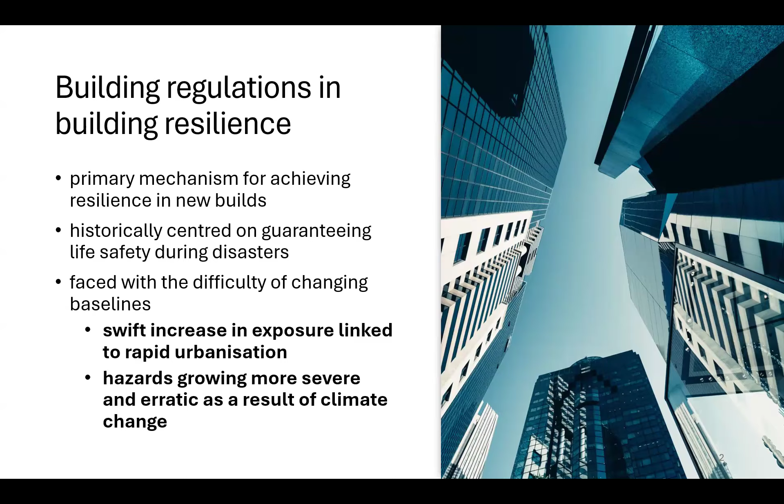Now, there are multiple ways by which we can have the building code contribute towards climate resilience, and we'll go through them one by one briefly in this presentation. So the four main things would be provisions on elevating material performance against climate hazards or climate impacts, increasing design loads, allowing provisions for adaptable and flexible designs, and finally, incorporating green building into the code.

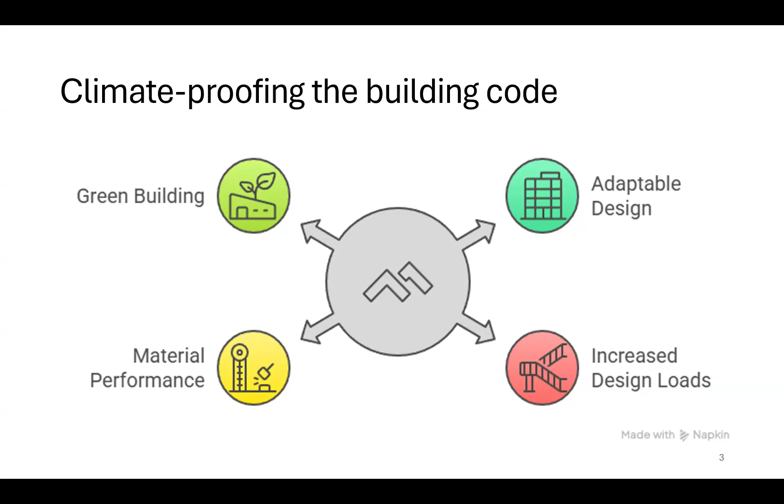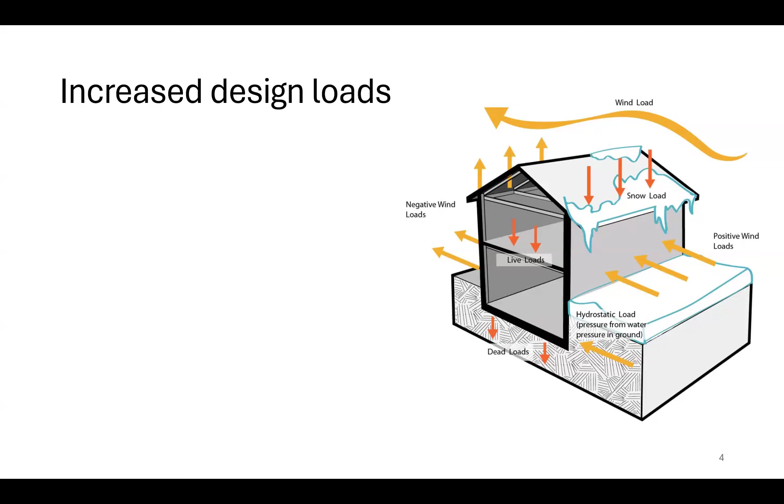The most common way by which we tweak our building code to make it more responsive to the impacts of climate change is by increasing design wind loads. I've seen this in my experience in updating the building codes in the Philippines. In the aftermath of Cyclone Haiyan, the wind zone map was updated to take into account newer maxima. So with increased design loads, we make our structures withstand more intense hazards as we update the probabilistic hazard maps.

Some countries would have their own flood codes, earthquake loads, and in the case of temperate countries, adjustments in snow loads. Increased design loads also give due consideration to updated hazard models and intensifying hazards due to climate change. From what I've seen so far, most of the codes only take into account what has happened so far and do not really take into account yet the possible trajectories with different RCPs. So there's still work to be done on that.

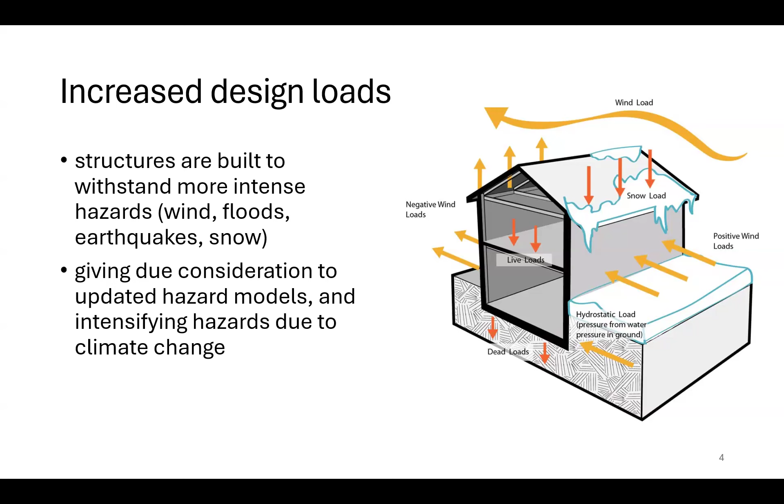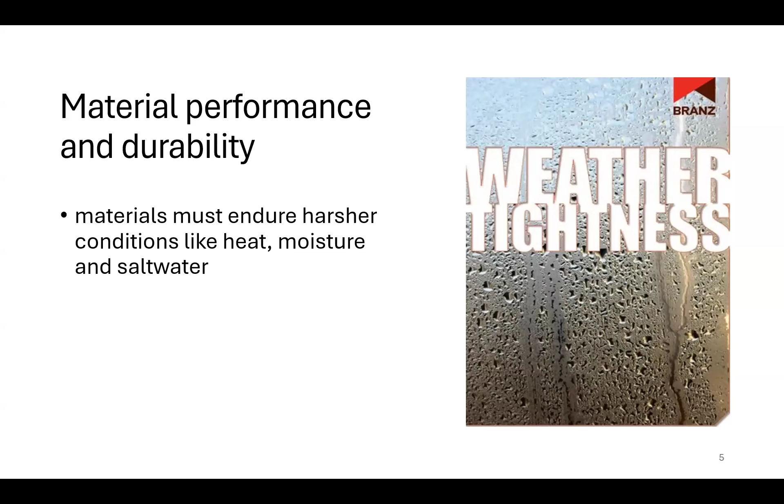The second way by which building regulations could be more responsive to the impacts of climate change, or making our built environment more resilient to climate change, is by incorporating provisions for enhanced material performance and durability. Again, due to climate change, materials now must endure harsher conditions than they had before. So conditions like heat, moisture, even saltwater intrusions, because we get more cyclones, and then therefore you get lots of sea breezes too.

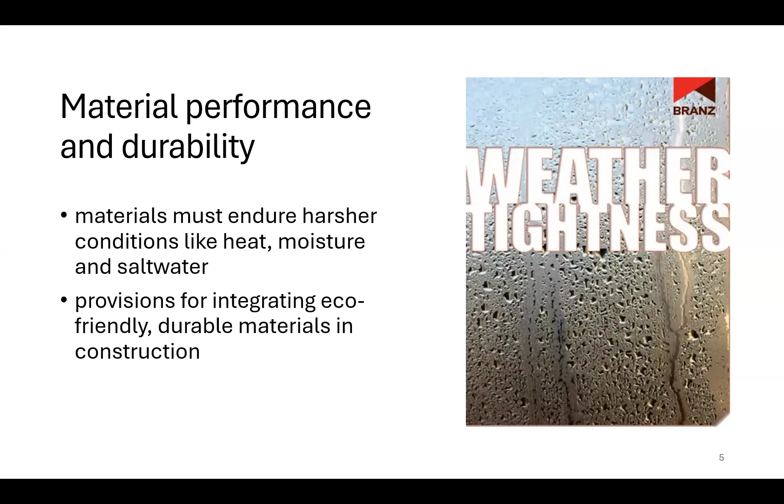And then there's also on the other end of the spectrum, we have material performance provisions for integrating allowance for eco-friendly or durable materials. The other thing is that, and I must say that this is one of the biggest challenges in making structures in the ASEAN more resilient to the impacts of climate change, is that we have strict prescriptive building codes. By prescriptive building codes, we mean that we tell the people how to create, or how to design structures.

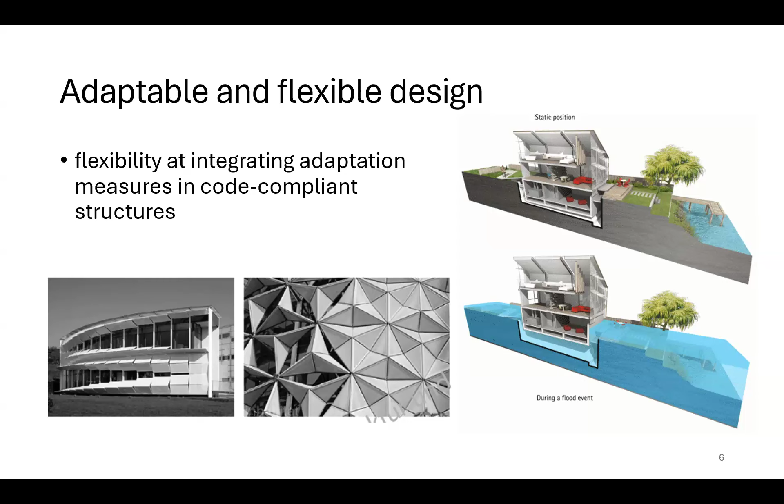And when we do that, we limit the possibilities by which we can configure our structures. Now, if you look at the building codes of most of the ASEAN countries, you wouldn't see provisions that you can comply with to implement, say, a house that floats with increased flood levels, or maybe window angles changing with the time of the day or the heat in the surrounding environment. So there's still room for improvement in that regard to allow flexibility at integrating adaptation measures in code-compliant structures.

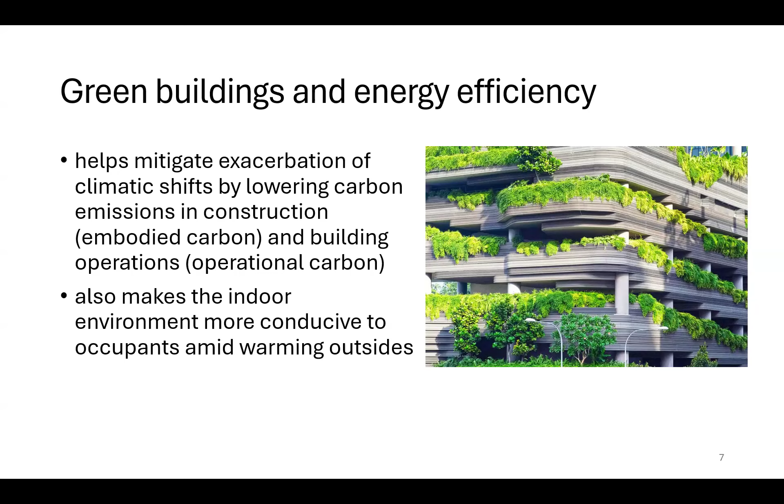And then lastly, we have green buildings and energy efficiency. So I think this works on the other end of the climate resilience. So green building provisions help mitigate the exacerbation of climate shift by lowering carbon emissions in construction, both the embodied carbon and the operational carbon. At the same time, it also makes the indoor environment more conducive to occupants amid a warming outside environment.

Now, building codes not only shape the resilience of the built environment to climate hazards or to climate impact, building codes themselves or building regulations themselves are shaped by the hazards that happen in an area. So, for instance, Jamaica had their first building code implemented in their country after their Hurricane Gilbert experience. So they adopted the International Building Code. In Australia, they updated the wind-related structural standards in the aftermath of Cyclone Tracy, which caused heavy devastation in the Northern Territory, part of Australia.

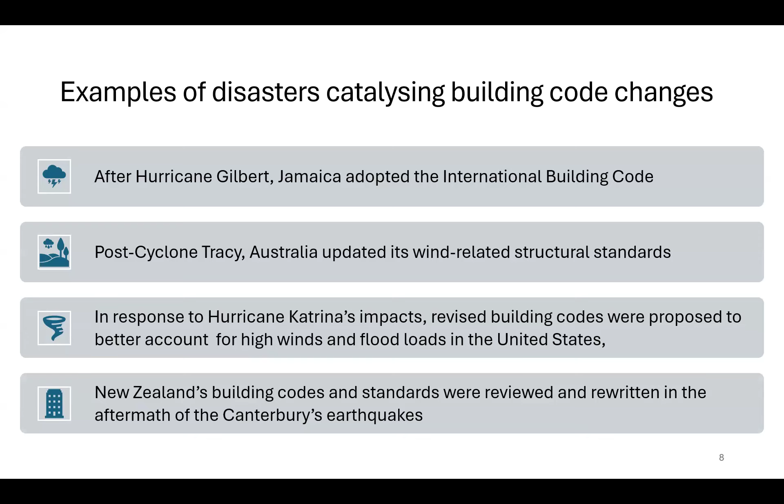In response to Hurricane Katrina's impact, the U.S. revised their building code to better account for high winds and flood loads. And in the aftermath of the Canterbury earthquake, the New Zealand building code and standards were reviewed and rewritten. However, not all of these updates or these upgrades and changes to the building codes have been successful.

So I would say, based on reviews, some of the challenges causing us to still have inefficiencies, or building code updates not resulting in enhanced resilience, is that there may be the inability to elicit regulatory compliance. So we may have building code, but if the regulators cannot implement them anyway, it doesn't amount to anything. And this stems possibly from poorly planned rollouts, but also it may stem from the lack of knowledge and capacity by building practitioners. So it will take time for building designers, constructors to be able to grasp and be familiarized with revisions in the building code. So it's up to the policymakers and decision makers to accelerate that adoption.

It may also be that the building codes that we adopt could be incompatible with the local building stock. And that would be, I would say, the experience of Jamaica after they adopted the International Building Code. But I've seen that also in Fiji adopting the Australian and New Zealand Building Code. But then these codes cater to contemporary structures. But how about the traditional structures like bure?

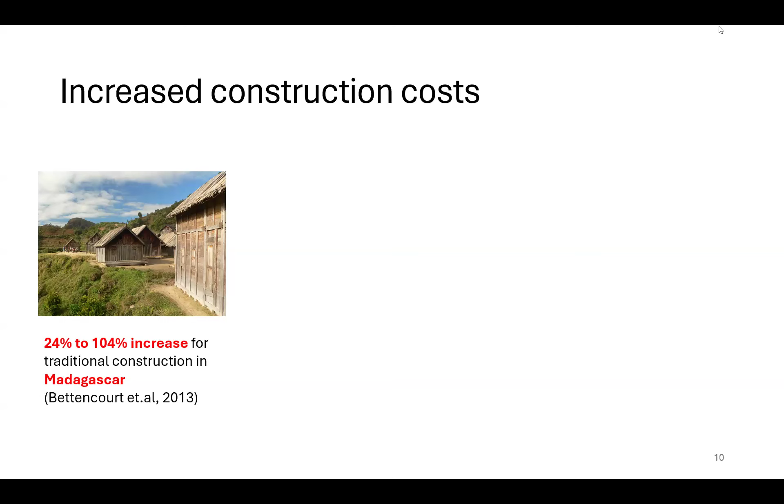And then the other thing, which is equally as important, is that people may want to comply, but because of budget constraints, because of prohibitive costs, they're unable to afford compliance. And we've seen that in the case of Madagascar updating their building codes. So they've seen a 24 to 104% increase in the cost of traditional housing units in the highlands of Madagascar. And then after Australia implemented changes to its fire protection provisions, after the Victorian bushfires, there was a 30% average increase in housing construction in Victoria.

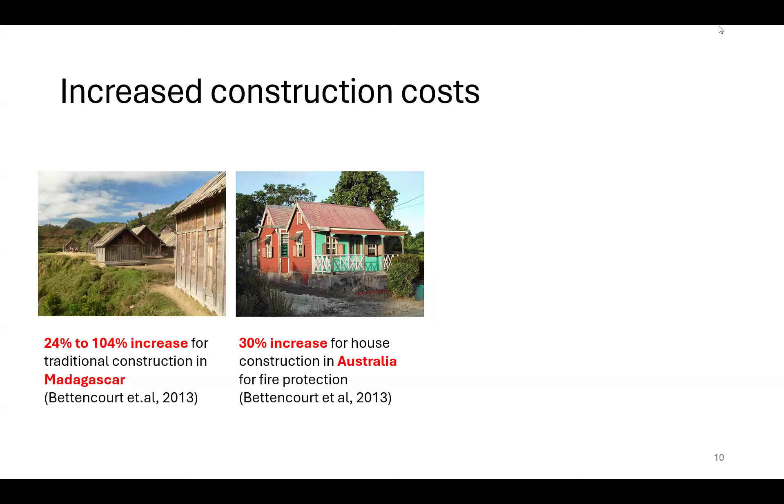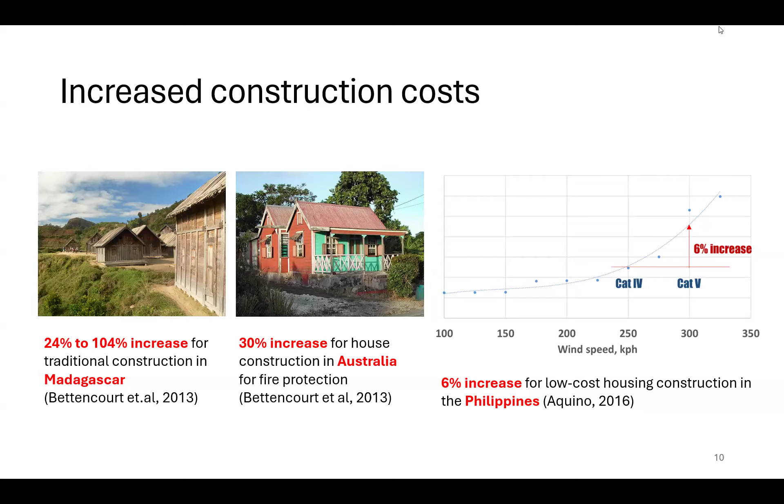And in the Philippines, when we adjusted the wind zone maps in account of more recent hazard events, there was a 6% increase for low cost housing on the average. Now, we might say, okay, these may just be upfront costs, but if we look at it on the long run, then we would actually see the benefits.

And so in this slide, I just show a quick calculation of the economic analysis from a life cycle perspective. So the additional cost that we spend with the building code update is denoted by the left-hand side, alpha C, where alpha is just the percentage increase in the cost, and C is the original cost of construction. And that has to be equivalent to the net present value of the expected annual loss for the building throughout its useful life.

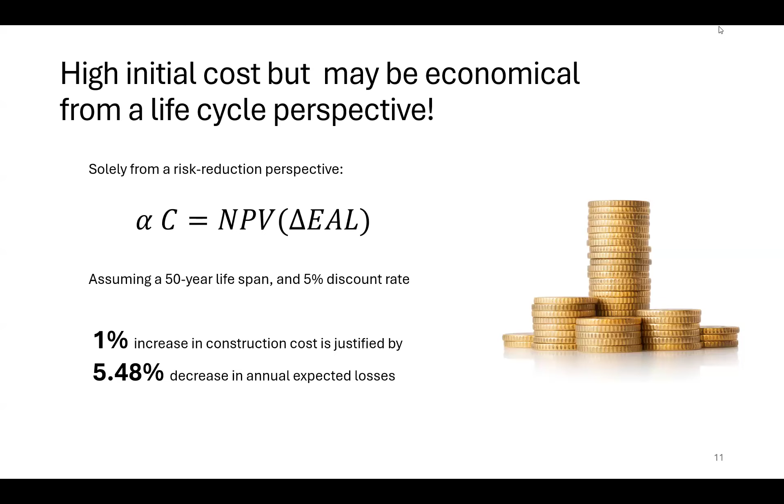And if we assume a 50-year lifespan for the building, so in most building codes, we have a 50-year assumed lifespan for buildings, and a 5% discount rate or interest rate, 1% increase in the construction cost would be justified by a 5.48 decrease in the annual expected losses. So this equation would allow us to do a quick math on whether the increase in the construction cost would be reasonable. Well, that's just one aspect, obviously, because affordability by the complying parties is also another thing that we need to address.

Now, in addition to looking at it from a life cycle perspective, what worked for the Australian case after Cyclone Tracy is that they introduced specific manual per state. They also updated the structural standards for wind design, but the code upgrade was supplemented by the establishment of the cyclone testing station at James Cook University. So that enabled the grounding of further building code updates on empirical data. At the same time, there was targeted training programs for not only contractors and builders, but also those who would need to do the regular compliance audits or the building inspectors.

All right. So let me just say that this is possible, and building regulations, if balanced against the cost or the affordability, and if also balanced against the capacity of your building practitioners to implement it, would be a very good instrument towards achieving climate resilience.

Hi, Harold. I wonder how significant the cost of the project would be compared to the typical conventional construction project. Can you see it from the chat box, Harold? Oh, yes, yes. Thank you for the question, Hisham.

I would say that is very heavily context dependent. So I've seen in the cases of Philippines and in Fiji, but I've also done some studies in the context of New Zealand. So it varies very heavily. In the Philippines, you get a lot of low cost labor, and the materials are a bit cheaper. So if you upgrade the building code from a Category 4 to a Category 5 cyclone resilience, then you would only need 6% increase. But if you do the same for Fiji, which relies heavily on imports of steel, and also would have a bit higher labor cost, that amounts to close to 30% increase in the construction cost.

Now, injecting the sustainability elements, I've encountered a lot of studies also looking into cost increases arising from energy retrofits in buildings, and I would say that it also heavily varies depending on the technology that you're adopting, and also the specific context you're building it in. I hope that answers the question.

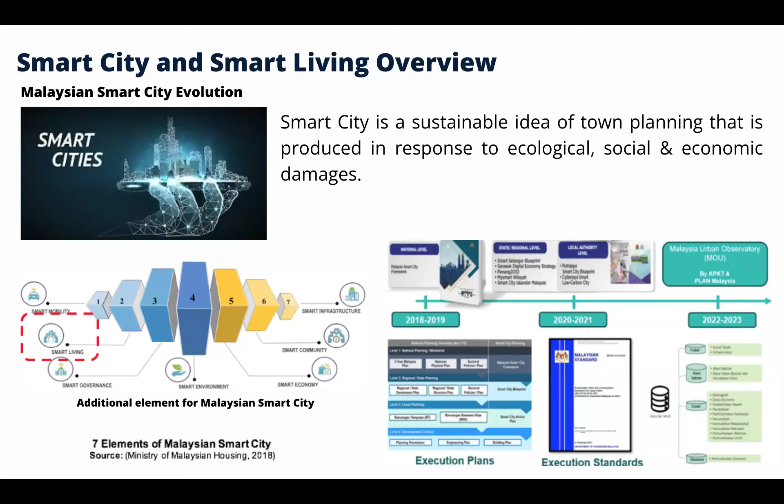Okay, so what is actually the difference between smart city and smart living? Smart living is a subset of the smart city elements, whereby we look into the well-being of the occupants. On top of that, it is also a combination of smart homes and smart appliances, and we also focus on the quality, security, and healthcare of the residents.

This research was actually inspired by my own experience taking care of my dad, but he doesn't want to live with me, living in another town. So this research is really close to my heart, because in Malaysia, we are going towards an aging population. For the Malaysian audience today, we've been alerted. We've seen recent cases of people living alone and then dying alone, only noticed by the neighbors upon smelling the deceased bodies.

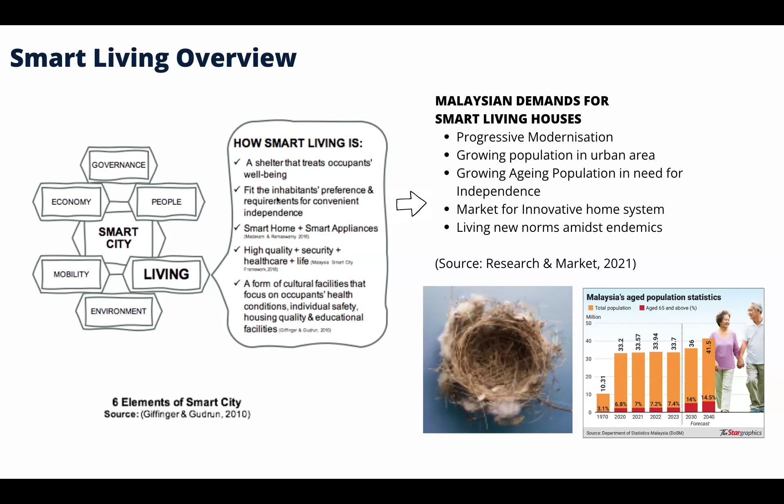Okay, so since we don't have the adoption yet, we borrow from others. We look into Singapore's smart living implementations, which focus on interactive sensors, home management, and water and waste management. But consider this, Singapore is a developed country. Likewise, Helsinki also focuses on technology.

Smart home solutions, renewable energy. But similar to Malaysian characteristics, Bangkok and Ho Chi Minh, Vietnam, focus on the technical aspects, which are video monitoring, lighting control systems, and of course home entertainment. The difference is the first two are developed countries, so they mostly focus on retrofitting smart living onto conventional buildings, as opposed to Bangkok and Ho Chi Minh, where we build new townships with all these smart living features.

Okay, so upon looking at all the aspects, the features of smart living, we categorize it into three: social, economy, and environmental. So you can see all this is actually considered as smart living features, categorized accordingly.

And then we further, as quantity surveyors, would like to categorize the cost accordingly into the elemental. That's why we have this townscape categorization and buildingscape categorization. But from the values perspective, when you want to consider the value for the facility, you will always consider the building aspects rather than the townscape. The townscape value comes slightly later compared to the building cost.

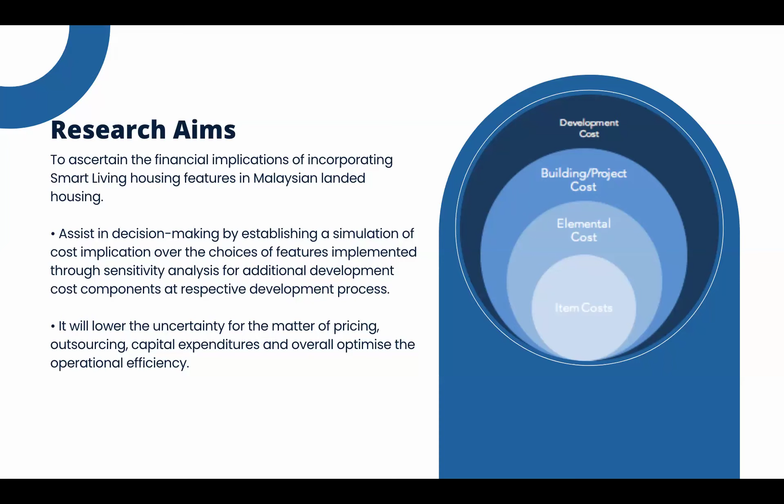When we want to delve further and consider cost implication, we need to know the tools for decision making. For quantity surveyors, thankfully we have this cost model to assist us in viewing or considering what is the cost implication, not only the cost per meter square per se, but by the elemental.

That's why we first want to determine what is the housing smart living feature most applicable to the Malaysian perspective. The second one, we develop and simulate the smart living housing. And finally, we validate our smart cost model.

So how we achieved our research: we started off with a questionnaire survey, whereby we distributed the questionnaire and came up with all these 49 smart living features. Most of our respondents are developers.

Once we manage to get all the smart living features considered applicable to the Malaysian context, we then go to our cost data analysis, because we go for case studies to get our cost data in order to come up with our cost model.

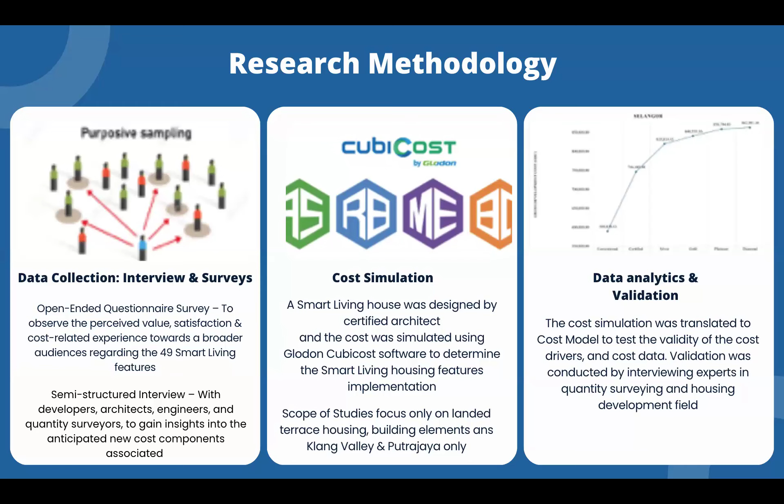We do the cost simulations. When we've managed to acquire all the smart living features, we use cost software to do our cost implication simulation. Finally, with this data validation, we run through the sensitivity analysis to show the cost implications of having more or less smart living features on the building housing development.

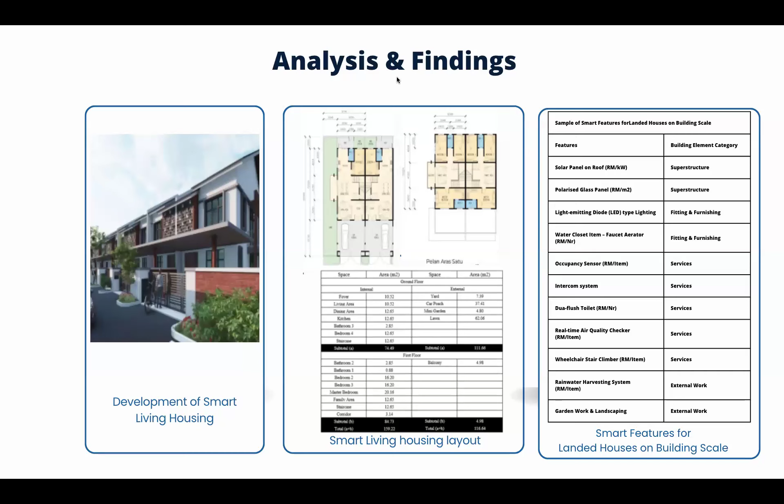So this is our findings. We are focusing on landed property first, because in our research we covered two types: landed property and apartment. If you notice on your right-hand side, these are the features considered applicable to the Malaysian context from our respondents, and it's according to the elemental aspect.

When we want to consider the cost implication, we need to know how many features will have the highest cost implications in order for us to build a house. This is additional findings that we managed to get through our research.

We actually imitated this GBI rating tool and put it into this categorization. We need to do this sensitivity analysis because the more features you put in, if you want to build a smart living house, obviously—this is the hypothesis—it will be more expensive, right?

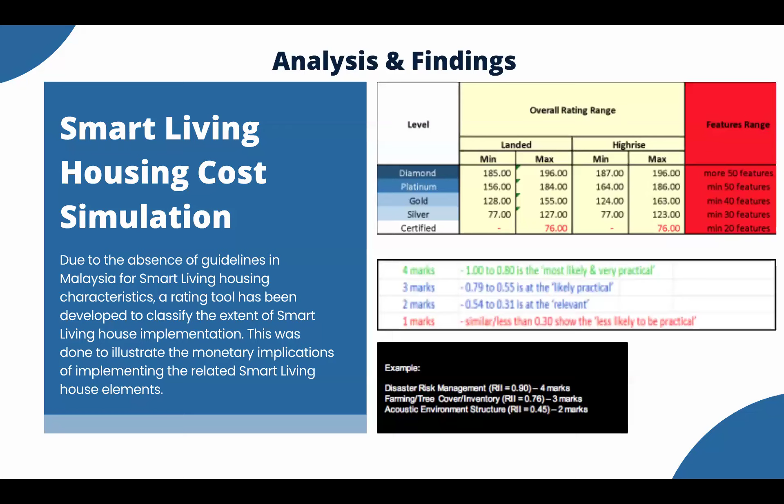From the research, we managed to find these additional smart living features, again according to the building elements aspects. You can see the additional items for the superstructure is polarized glass panel, solar panel on roof, water closet items for fittings and furnishing, LED, and for the services, sanitary appliances, the dual flush toilet.

If you notice all these items, you can consider that we already have this item. But the thing is, there is no standard, as Harold highlighted. In Malaysia, we don't have a standard to say that by having this feature it is considered smart living housing, and to what extent. That's why we did this research.

So this is actually how we did the cost simulations. Let me just play the video. Once we get the cost data from the case studies, we run through—we design, we have our architects design the housings, and we use this software to do the cost implication.

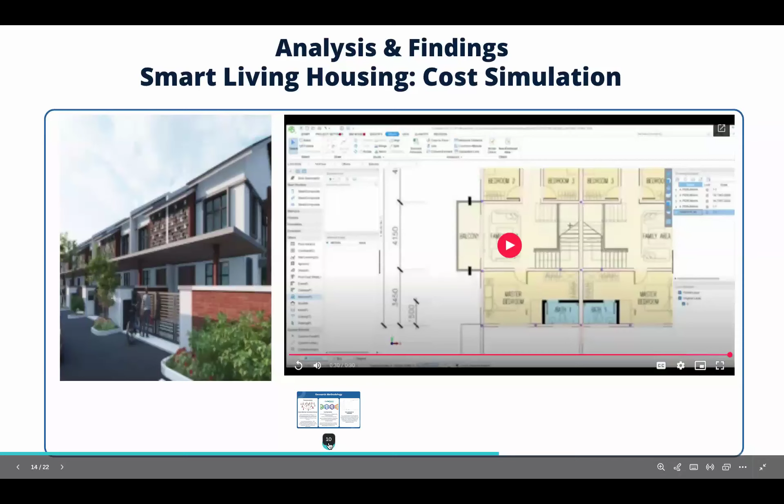The beauty of using this software is that we don't have to build the house yet with all the features. So we just use this BIM technology in order to do the cost simulations for this smart living housing.

This is the research outcome, the analysis. We categorized it using sensitivity analysis into 5 levels, which is certified, with the least smart living features, and diamond with the most smart living features. We compare it with conventional housing to know the comparison, how much it increases. Harold just highlighted the one in Australia for fire protection itself, which increases around 30%. So for Malaysia smart living housing, the cost implication is as according to these slides.

Again, when you develop a cost model, you need to know not only the features, which is really the drivers of smart living, but also the items, the yardsticks, and finally the cost data. That is actually the outcome of the research.

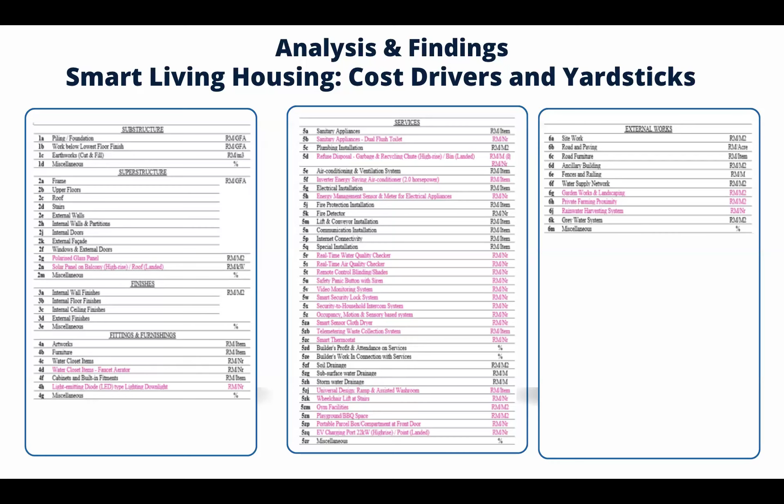We managed to categorize and standardize all the yardsticks, because from our case studies, developers actually put it into different kinds of cost yardsticks. So by having a standard measurement, yardsticks, we can actually do a proper cost simulation.

This is the analysis to compare the increments of cost comparing to the conventional, onto the 5 levels of ratings. We put it into 2 ways of presentation, cost per meter square and cost per square feet.

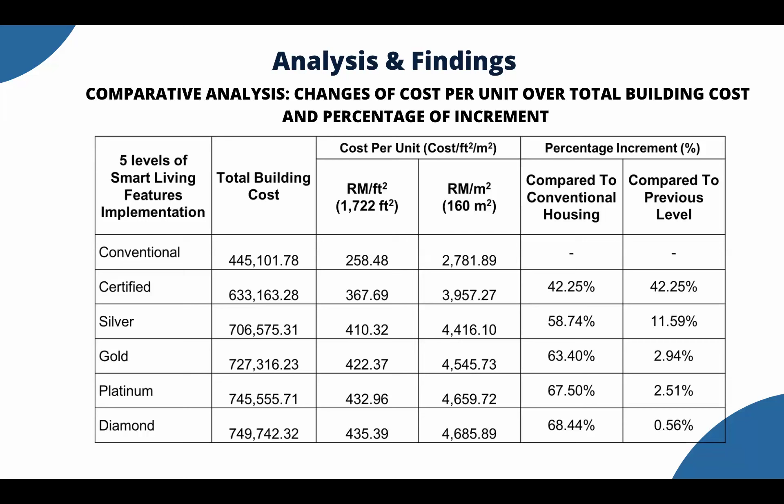From the quantity surveying perspective, we want to know which elements have the highest cost implication, which features, which elements. We found out that most of the features considering the smart living element is within the building services. It actually increases substantially from conventional, which is 157 ringgit 25 cent per meter square, to 753 ringgit 47 cent for a certified level of smart living housing. This is the lowest level of the smart living analysis.

As you add more features, obviously the increment will be substantial. So we conclude our research by highlighting this: the major costs will normally focus on the building services rather than the superstructure and substructure. Moderate cost increments are actually in the external works, and finally the minor cost increment will be in the superstructure.

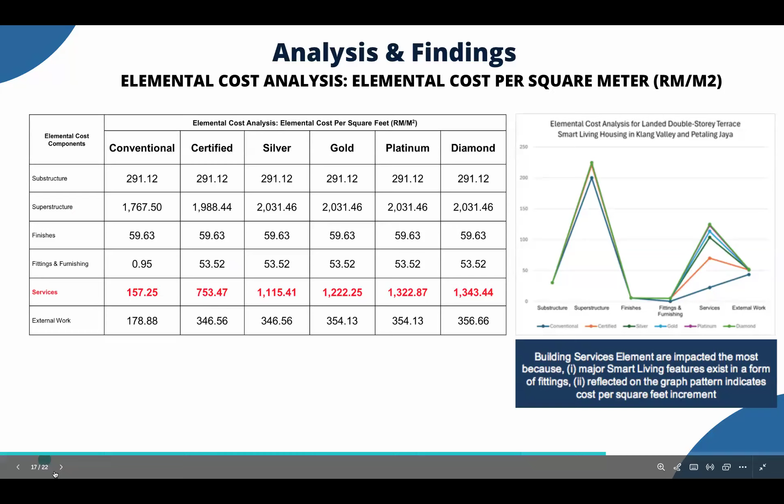This is the cost implication. To conclude, whether we can afford this smart living housing, it needs some consideration in selecting the features, because in a typical housing development we need to consider all the development cost components: hard costs, soft costs, land costs, and obviously the profit margin. The increments from conventional housing to smart living housing are quite substantial, and the focus is mainly in the building services.

So to put it simply, is it a luxury or necessity? I would recommend that it is actually a necessity, but we need to consider which features are more applicable for our needs. It can be luxury, it can be basic features. This finalizes the selection of smart living housing features as I highlighted previously.

If you can see, smart security lock system will be considered as necessity. Perhaps the portable parcel box will be considered as a luxury item to be included in the smart living feature. This is my research team: me, Paradiva, Dr. Muzani, and Ko Fun Cheng.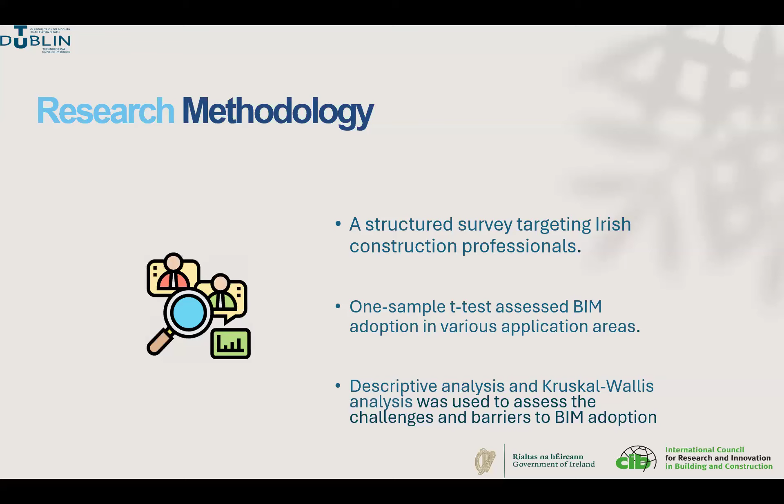We also sent out a structured survey targeting Irish construction industries, and a one-sample t-test was used, and we also did a kind of descriptive analysis and Kruskal-Wallis analysis to assess the challenges and barriers to BIM adoption. So the findings showcase that, before 2013, there had been minimal activity related to BIM in the industry, or even in the research institutions.

So from 2013, that is when there was a kind of a steady increase in the BIM researches and also the BIM related information being published online. And looking at the institutions, the top Irish institutions engaged in BIM research, we saw that Technological University Dublin, though this is not political, this is Scopus database, they're showing that Technological University Dublin is topping when it comes to BIM research and publications that have to do with BIM in the Irish perspective.

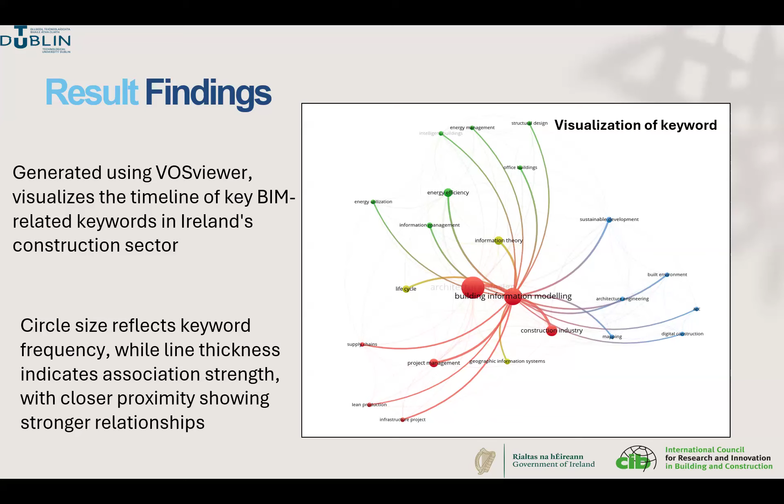So we had to also generate a visualization to show the timeline of key BIM related keywords in Ireland's construction sector. And you can see that the circle size reflects the keyword frequency, while the thickness of the line indicates the association strength between the keywords, with closer proximity showing a stronger relationship. And if you look at that visualization, you can see that architectural design is actually having a higher link strength of 64.

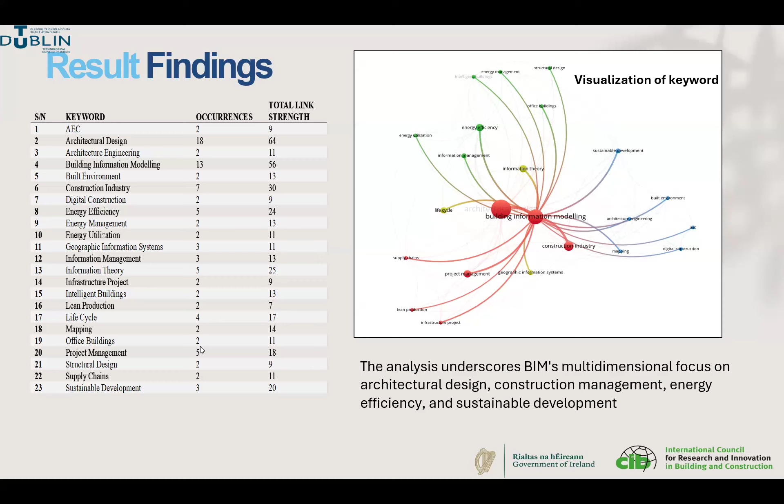And also we have building information modeling, though that may not really be much considered, but we can see also the other ones like energy efficiency, construction industry, project management, and sustainable development. So these are the key areas that few publications might have utilized. What it simply means is that the analysis underscores that BIM's multidimensional focus is on architectural design, construction management, energy efficiency and sustainable development in the Irish construction industry, or even in the Irish BIM related researches.

And doing the descriptive analysis and also one sample t-test, also showing something similar to what we got from the bibliographic data, showing that the architectural, structural, and MEP design is one of the key things that BIM is being adopted for in Ireland. So that is the major area that BIM is adopted for in the construction industry.

And then looking at the challenges, one of the key challenges is we still have issues related to limited skills and training. And we also have neglect in the areas of the small and medium scale enterprises. And there has been some movement in the industry, also in other sectors, trying to see how best they can train the small and medium enterprises to adopt BIM in the delivery of their projects.

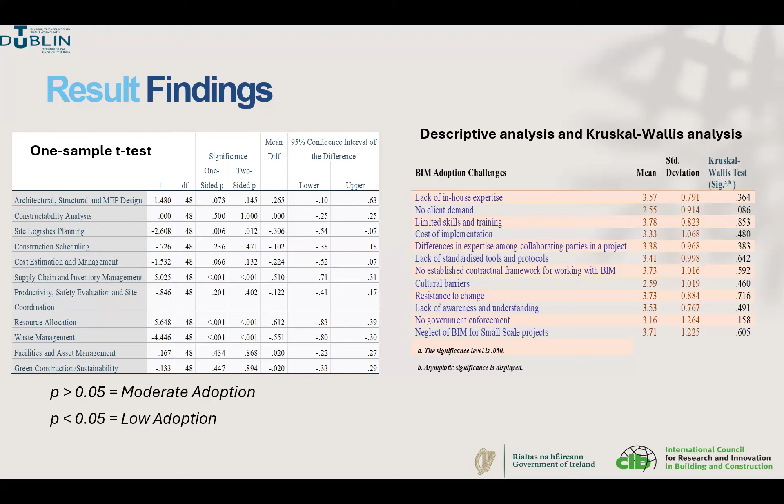One of the key major things the Irish government is doing is that they established an institution they call the National BIM Council, and there is also an agency called Construction IT Alliance (CITA) that has been carrying out what they call the digital series of webinars and trainings, and also upskilling programs for the small and medium enterprises and other professionals in the industry to ensure that the pace of adoption is increased in Ireland. So BIM adoption in Ireland is actually advancing, but it is uneven.

So one of the major things that we suggested is that we have to strengthen academia and industry research on energy modeling and life cycle costing. Especially, I carried out a similar research that has to do with cost management, and we saw that BIM is very much relegated when it comes to cost management in the construction industry. And especially those involved in cost management and quantity surveyors, we need to be up on our games. So we need coordinated training, standards, and monitoring to ensure sustainable digital transformation in terms of BIM adoption.